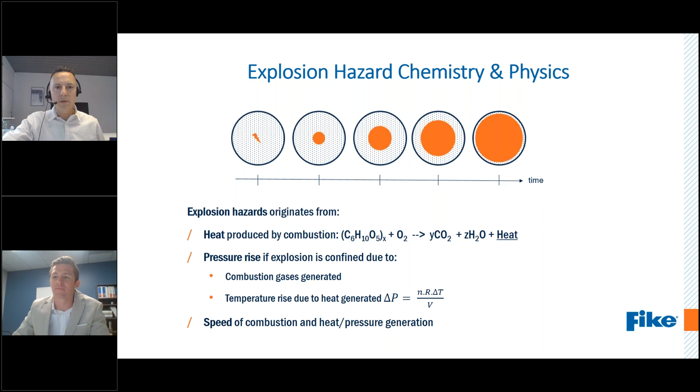The explosibility of dust depends on many factors, such as chemical composition, particle size and shape, moisture content, dust concentration, and turbulence level in air. It is good practice to have your dust tested in a lab to quantify the hazard it poses.

This can be done in a so-called 20-liter sphere, which is equipped with a dust dispersion system, igniter, and pressure transducers. The pressure recordings reveal the maximum pressure, Pmax, and the maximum rate of pressure rise, the dP/dt max. Since the maximum rate of pressure rise is inversely proportional to the cube root of the volume in which the explosion takes place, the speed of combustion is often expressed by the volume normalized value of the maximum rate of pressure rise, the so-called dust explosion constant, or KST.

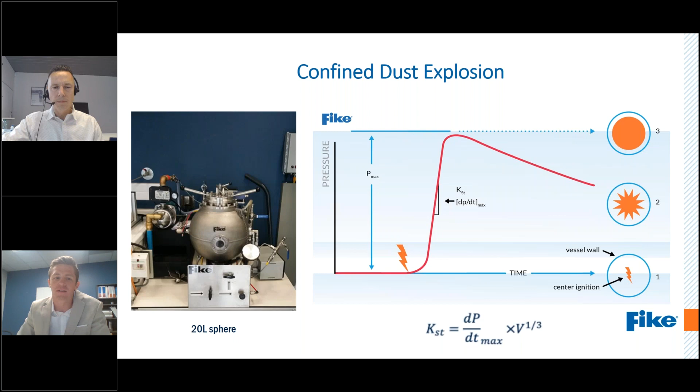The hazard of combustible dust explosions is not only expressed by the effects it can cause, but also by how easily the explosion can be initiated through a so-called ignition source. The most frequently occurring ignition sources in industry are mechanical sparks, followed by static electricity and hot surfaces. Also, exposure of a dust cloud to direct fire or welding flame is found to be the cause of the explosion, as well as self-ignition and smoldering. Malfunctioning electrical equipment can also initiate the explosion.

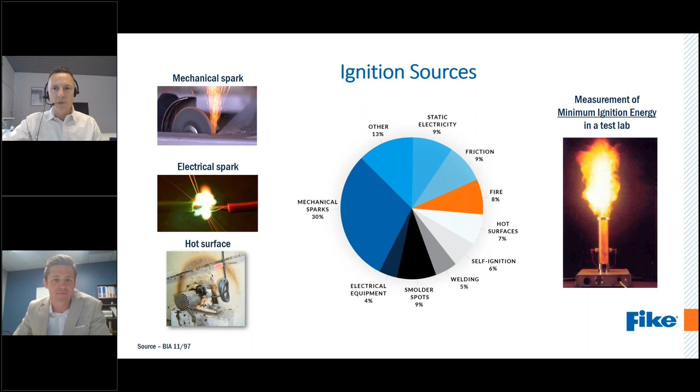The ignition sensitivity of dust clouds and dust layers can also be measured in a lab, and the results can be quantified, such as the minimum ignition energy of a spark and the minimum ignition temperature of a hot surface. The enclosed table shows some typical values of selected dust hazard parameters measured in a test lab. The maximum generated pressure, Pmax, varies from 8 to 10 bar for organic dusts, but can be much higher for metallic dusts. Also, the dust explosion constant KST can differ quite a lot per dust type.

Minimum ignition energies typically range from 5 millijoules to 1 joule, and the minimum temperature for a hot surface to ignite the dust layer is typically in the order of 300 to 500 degrees C. Unless otherwise stated, a lab will report the explosibility parameters for a worst-case situation. That means the dust samples sent in will be dried and sieved to retain the finest fraction before testing. Testing will happen at a range of dust concentrations in air, and the worst case will be reported.

For organic dusts, the explosibility range is typically between 50 and 3000 grams per cubic meter of dust dispersed in air. To give you an indication of how much this is, a 25-watt light bulb can hardly be seen from 2 meters distance through a cloud of 50 grams of dust in 1 cubic meter of air.

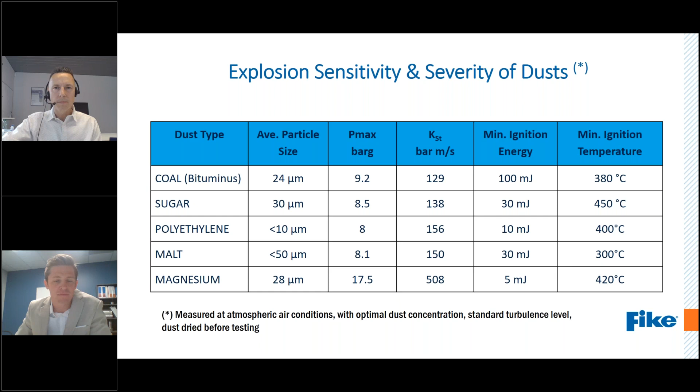Combustible dust clouds will typically be produced during regular processing operations, such as filling of a storage silo, cleaning of filter bags in a dust collector, or conveying bulk products with a bucket elevator. But dust layers just lying on the floor are also a potential hazard. Imagine a plate falls on the ground with dust layers. The dust will whirl up and can form an explosive dust cloud. If a motor is placed in the vicinity and has a hot surface, a combustion chain reaction may follow.

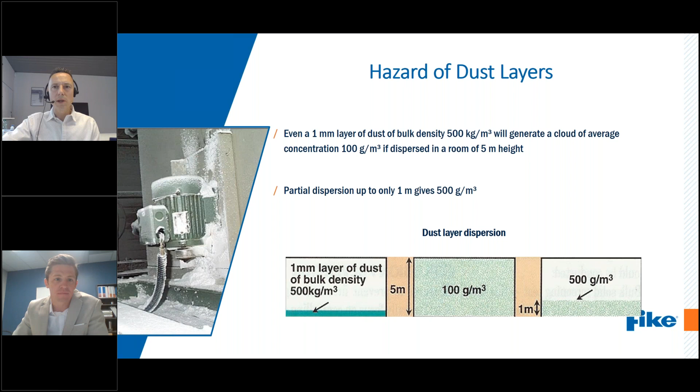It can easily be calculated that a dust layer of only 1 millimeter of product can fill a room 5 meters high with a dust cloud of 100 grams per cubic meter. Therefore, dust layers should never be allowed in factories, and dust cleaning operations are crucial for explosion safety.

Dust layers and accumulations can also be involved in secondary explosions. Imagine powder processing equipment is involved in an internal dust explosion. The explosion pressure rises and ruptures the casing of the equipment. A fireball and blast wave are ejected out of the ruptured equipment. Dust accumulations on shelves and floors in the vicinity are whirled up by the blast wave. Dust clouds are formed and sustain the combustion. With a bit of bad luck, when the factory is not cleaned of dust layers, the complete factory is involved in the dust explosion and a catastrophic event takes place.

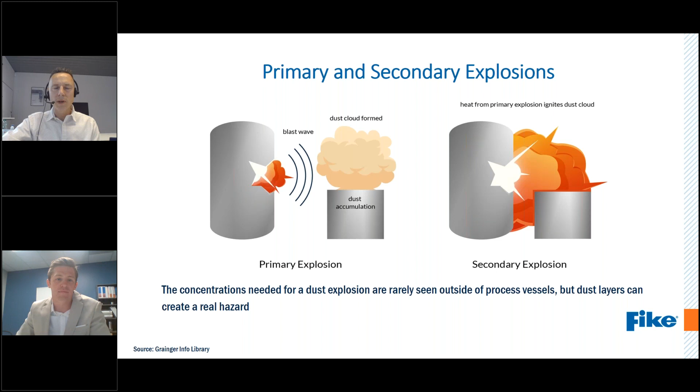Explosions can not only propagate in a factory through whirled up dust layers, they can also propagate from one piece of processing equipment to another through interconnected pipelines. We will show you videos of dust explosions executed on the Fike remote test site that demonstrate this phenomenon. Wood dust is dispersed in a 5 cubic meter vessel and ignited. The vessel is fitted with explosion vent panels to prevent it from uncontrolled rupture. 16-inch pipelines 10 meters long are connected to this vessel, and a blower makes sure air flows through the system prior to ignition.

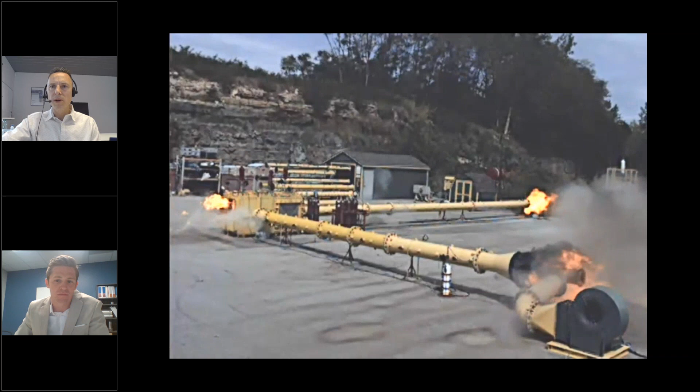As you can see, following the dust explosion in the vessel, dust and flame is reversed out of the vessel due to the explosion overpressure and propagates totally to the end of the pipelines. Even with clean pipes at the start of the explosion, enough unburned dust is ejected out of the vessel into the pipelines to sustain combustion for several tens of meters. Blowers are typically not able to push back dust explosion flames.

Explosion mitigation measures should therefore not only protect process equipment vessels, but also their interconnections. If the connections between the process equipment vessels are not protected, explosions can propagate from one process vessel to another. This not only increases the scale of the dust explosion, it also makes the situation more and more unprotectable.

A dust explosion experiment carried out with a 1 cubic meter and a 5 cubic meter test vessel showed the maximum pressures and the maximum rates of pressure rise were considerably increased when both vessels were interconnected and the explosion was allowed to propagate from one vessel into another, compared to the situation where both vessels were involved in isolated explosions. Rates of pressure rise increased with factor 20.

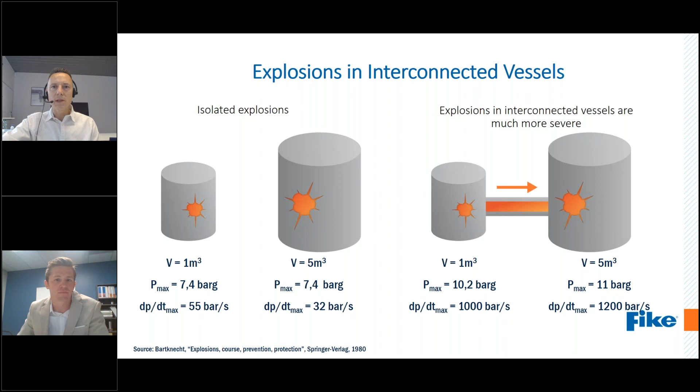Now that we gave you an overview of the different explosion hazards that are constituted by combustible dusts, it is time to start thinking of steps to take to protect against the hazards. Normally 4 steps are taken. Test the dust to see if it is explosive, how sensitive to ignition, and how severe when it explodes. Where in the factory is the dust? Where are the potential ignition sources? Remove sources of dust, eliminate ignition sources, and apply mitigation measures in case the dust explosion would still occur.

With this, I give the word back to Carson, who will introduce the next speakers who will elaborate on protection steps, regulations, and the road to compliance. Thanks, Jim. Gotta say, again, thoroughly impressed that you're able to get that all in the short amount of time that we have. That's literally the smallest little bitty tip of the iceberg.

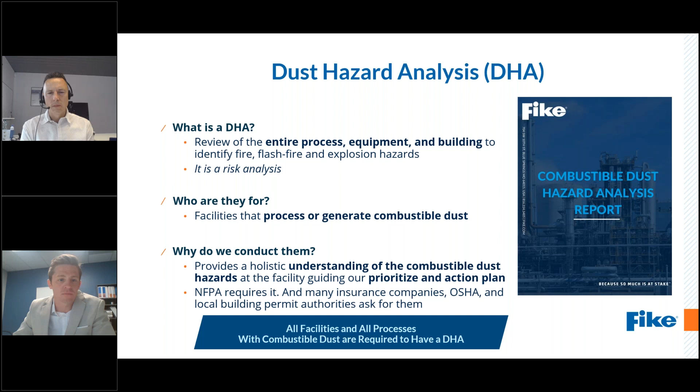And in closing my section, Carson, I'm handing it back to you. Thanks, Bruce. Super nice summary. I know you could write a book on this stuff, so I really appreciate your time today, and we all do.

So that covers one side of the globe. There is a whole other half of the world that has the same hazard, but maybe a slightly different approach. So to discuss the European approach is our Fike Europe-based explosion protection scientist, Dr. Dimitrios Gakogiannis. Good afternoon, Demi, and thanks for being with us today. I'll turn it over to you.

Thank you, Carson. Thank you for the introduction. Thank you also, Jim and Bruce, for referring to this presentation. So I'm going to talk about safety regulations and compliance, but focusing mainly on ATEX. What do we do here in Europe, and how do plant owners and manufacturers comply with the law for safety.

First of all, I'm going to start with the basic idea behind safety regulations, the basic idea behind ATEX, but this is a very general idea for all safety regulations, and it's something to keep in mind. So three words are the magic words: prevention, avoidance, mitigation. PAM are the initials. So step number one is the prevention of formation of explosive atmospheres in a place where we have a hazardous substance, like the ones Jim presented.

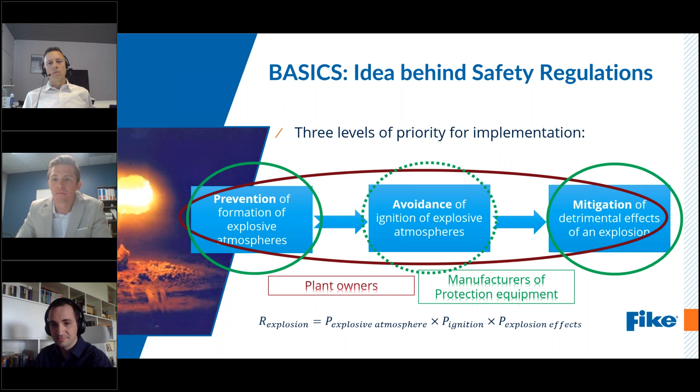So that's the basic idea behind these regulations. That's the intention, that's the strategy in order to avoid an explosion. And another basic concept which I would like to present and discuss is, let's say, the bureaucratic part. So first we have a strategy, the technical approach to the problem, but then we have to have an administration process that is going to oblige plant owners and manufacturers to align and focus on these three: prevention, avoidance, and mitigation.

So this is done by laws, standards, and harmonized standards. The laws are rules that, if they are not respected, there are penalties. The standards are kind of agreements that show an intention to comply with the law. They are commonly recognized methods that, when applied in a workplace, reassure that there is the intention to comply with the law. Harmonized standards, on the other hand, go hand in hand with the law within Europe, and they are kind of instructions for plant owners and equipment manufacturers to help them comply with the law. And I'm going to explain it in a while.

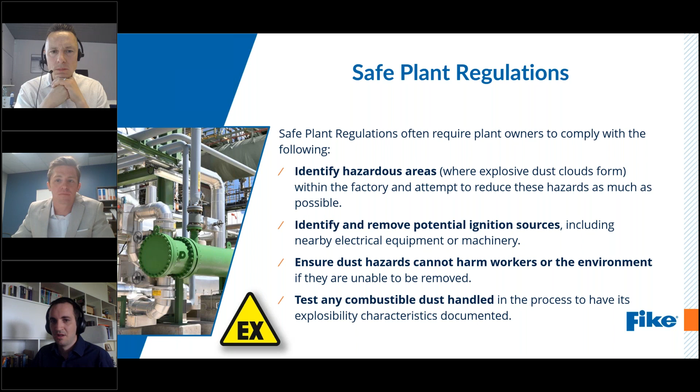So actually, these steps presented before can be summarized again into prevention, avoidance, and mitigation. Prevention of the explosive atmosphere, avoidance of the ignition, mitigation of the blast wave in case of an explosion. As I said, there is a classification of the hazardous areas. You often see this symbol. Within ATEX, we classify the zones in 3 categories, depending on how dangerous they are.

So there are certain areas in the factory where the hazard is going to be present more than in other areas. These areas are tagged like this, and they have to have this sign. So there are three categories, as I said. We have zone 0, 1, and 2, or zone 20, 21, 22. This is for gases and vapors. This is for dusts. Zone 0 or 20 is the most dangerous one, because there we continuously have a dust cloud or mist present. In zone 1, we have a cloud or a mist that is likely to occur, and zone 2 is the safest, let's say, the most easygoing.

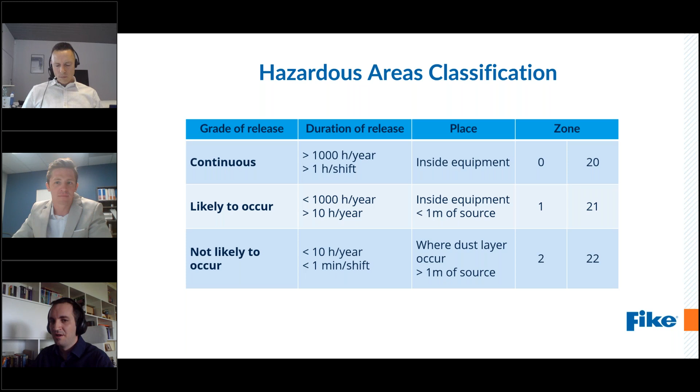And let's go now to discuss ATEX 114 for the equipment. So this part of the directive addresses electrical and mechanical equipment. And it applies to all member states, as I said before, for all manufacturers that want to distribute products within the European Union. What are the obligations of the manufacturers? They need to identify and remove potential ignition sources. The device should not pose a threat, should not be emitting sparks, should not be hot.

They should demonstrate by design, experimentation and testing that the equipment does not generate ignition sources and that the protective system performs as it's supposed to, according to its design. So these efforts are documented by third-party notified bodies, as they are called in Europe. So it's a third party that is going to provide the certificate, and it's going to test the equipment. It's going to document everything, mark the equipment.

So all devices within the workplace where there is an explosive hazard need to have a marking, and all these papers need to accompany the device. There are documents that describe the performance of the product, the proof that it's certified, and they need to be together with the product.

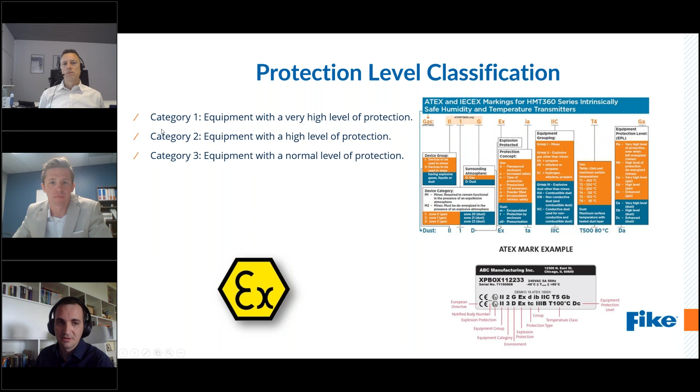And here you can see the whole connection between ATEX 153 and ATEX 114. We have the zones, the most dangerous, the less dangerous, the least dangerous, with the categories of equipment. So you can enter these zones with these products, you can install these products in these zones, or the worker carrying these products can enter these zones. So everybody knows what to do, and the rules for plant owners and manufacturers align together. And that's the last slide, concluding on how ATEX works.